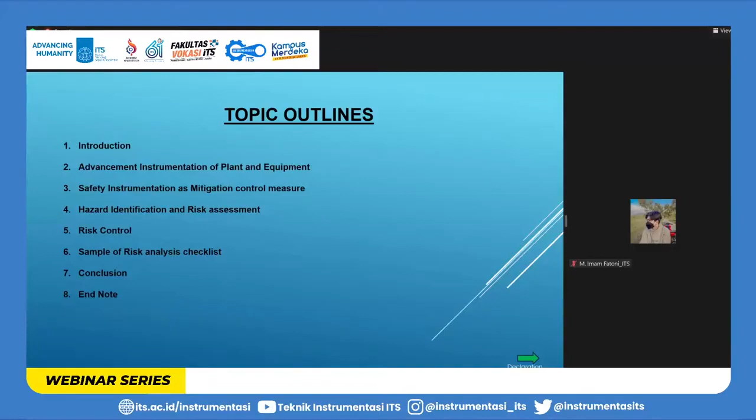Based on a report from the same agency, the ILO, they estimated that around 2.3 million workers around the world are affected by work-related accidents or disease. This results in around 6,000 deaths every single day, and around 340 million occupational accidents every year. So this is the extent of the occupational accident problem worldwide.

Now, as a case study, I would like to also show you data taken from the Philippines, but this one is a little bit late because I don't have the latest data.

Maybe they are not yet released. So in the Philippines, this one is reported by the Philippine Statistics Authority.

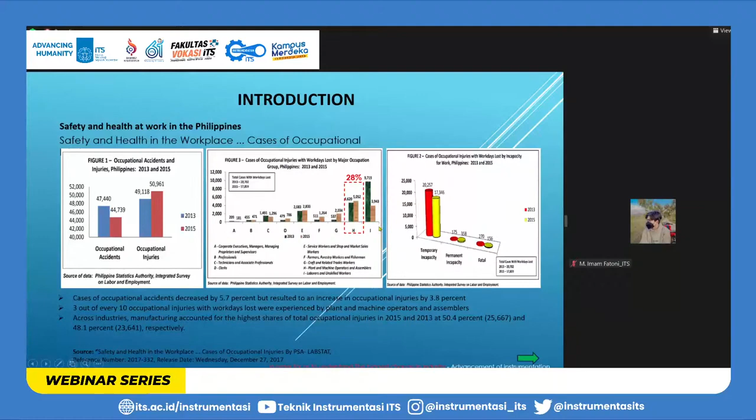A contrasting result. Now, on the second graph, you can see that 3 out of 10 occupational injuries with work stoppage, where the operator or employee cannot work, is actually coming from plant and machine operators and assemblers, or in short, manufacturing. Also significant is that the highest is actually in construction, or manual labor. But you can see on the following survey, it goes down very low, while in comparison, manufacturing is actually going up.

Okay, now on the third graph, we can see that the injury resulted in 97% temporary injury, 2% resulted in permanent injury, and 1% resulted in death.

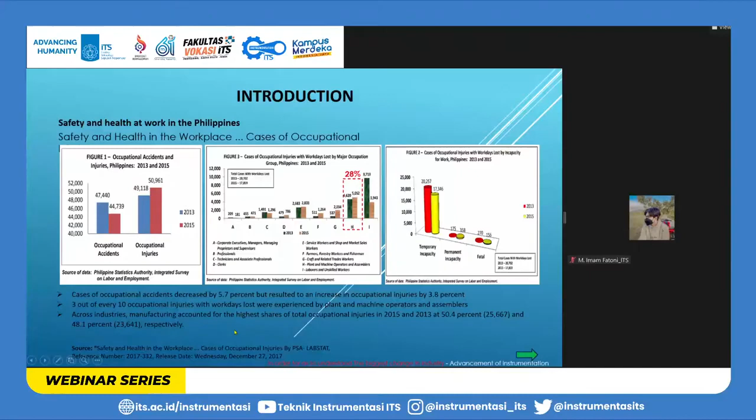One more thing I think needs attention. A significant finding is that across industries, manufacturing accounted for 50% of occupational injury. So this is very significant. Now, what is the difference between chart number 2 and this one? This highlighted 50% actually included both the major injury that caused downtime and the minor injury. So anyway, the highlight here is the 50% injury that was incurred by manufacturing.

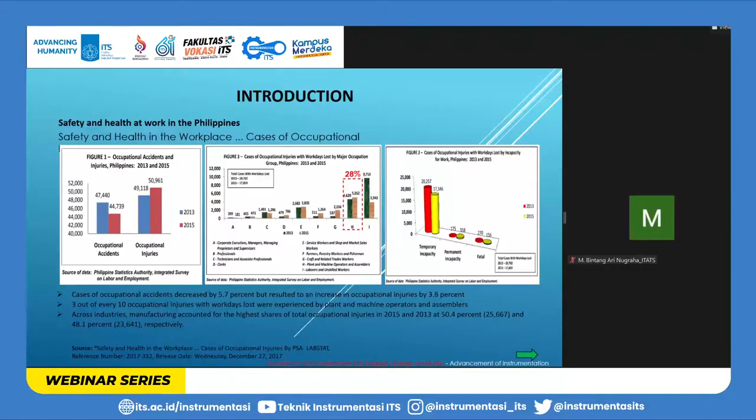Now we will check what is the difference, or the changes, or the development. Why is it that manufacturing is the highest? If you look inside the manufacturing industry, you can see the biggest change is actually the advancement of instrumentation. Many countries, even in your country, I believe in Indonesia also, advancement of instrumentation or automation is very significant, more significant than in the Philippines, I believe.

There are so many benefits of automation, such as the reduction of total operating cost, increase of production, improved operator efficiency, productivity, and increase in safety. Let me highlight this one: increase in safety. Then there's maintenance, precise measurement, improved monitoring, and many others. This is why instrumentation is very, very important.

Now let me go back to the increase in safety. I always thought that this increase in safety is the result, or the cause, of why the incidents in the first graph are actually going down. But what this cannot explain is why the result or the extent of injury is going up. Now, why do you think the extent of injury is going up, even though the occurrence of accidents is going down?

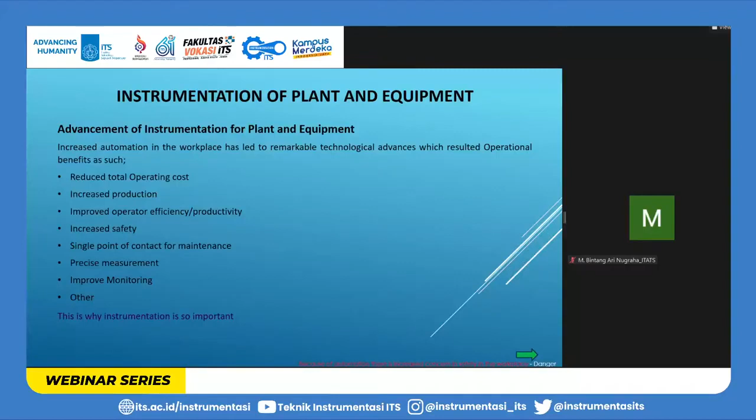The primary reason, in my opinion, is that the increase in automation makes the process more complex. Because it becomes more complex, there are many things to monitor, such as parameters like temperature, pressure, and position. If one of these fails, it may result in injury, and it may not be the person operating the machine, but maybe others. That's why most operators of machines are trained personnel.

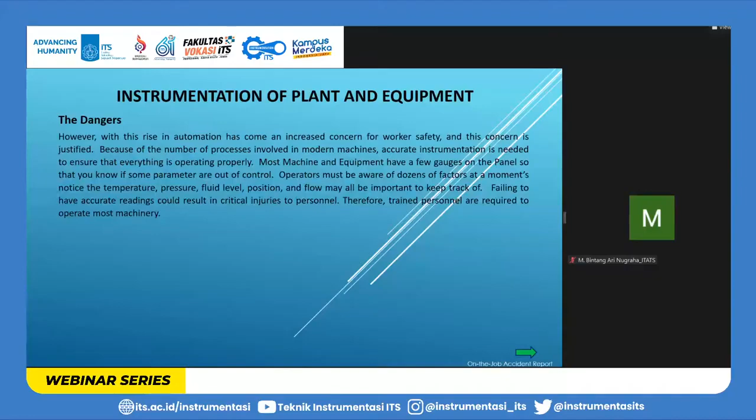Now let me show you some actual accidents that happened in manufacturing. This one happened in my previous company, in the Philippines. What happened here is that the operator's hand was caught by this press machine. This one is still lucky, because all of the fingers were not cut, only broken bones, but they could still heal. That's why it's very lucky. This is a very strong machine.

Now, what's the problem with this machine? This sensor, let me highlight this one, is a curtain sensor, or area sensor, I mean. The problem with this one is that it fails, it malfunctions. So that's why, instead of the machine stopping when the hand crosses this sensor, it was delayed, and the hand was caught.

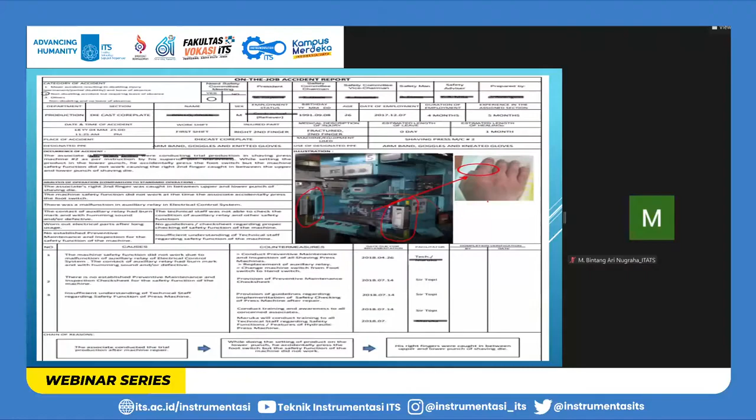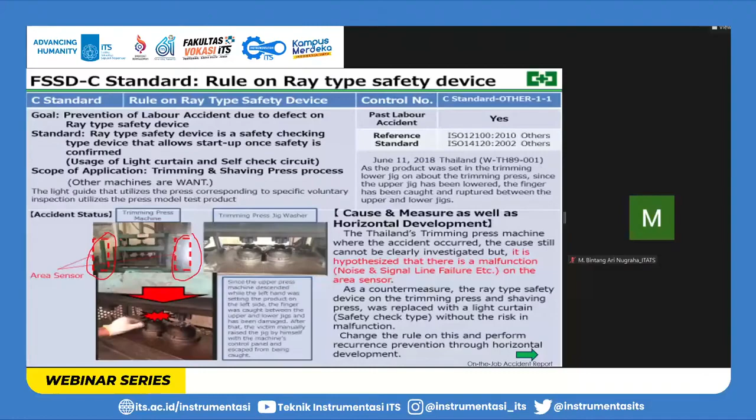This problem also happened in Thailand, at one of the branches of my previous company. It was the same machine, the same sensor. The sensor also failed again. So what happened to the sensor? Now, if we study the sensor, this is an area sensor.

But the problem is this particular relay is the one that has a malfunction. It's an intermittent problem. It's not actually damaged, but sometimes it's okay, sometimes it's not okay. So intermittent. That's why it's very, very hard to solve. Now, the question is, is there a solution to this one? Of course there is. Everything has a solution. So now, what is the solution?

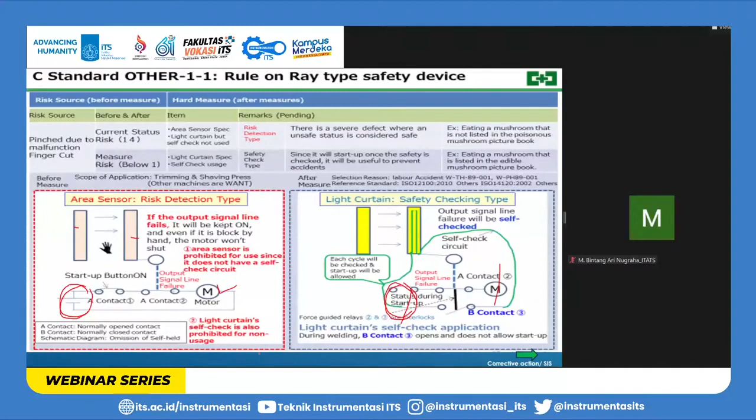Then what is SIS? Okay, SIS is a safety instrumented system that controls the system and operates if a certain safety incident occurs. So that is the meaning of safety instrumented system. The function of this SIS is to monitor the process for potential dangerous conditions and take action when needed to protect the process. Okay, to understand this one, let's take a look at this figure, the drawing in our presentation.

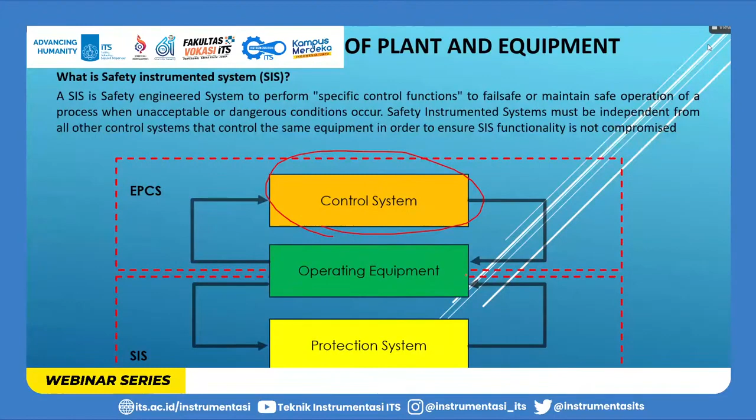Assuming that this is the machine, the movement of this machine is being controlled by this controller. Okay, the movement is based on the design to create whatever product it is designed for. Now, it also has installed many safety parts.

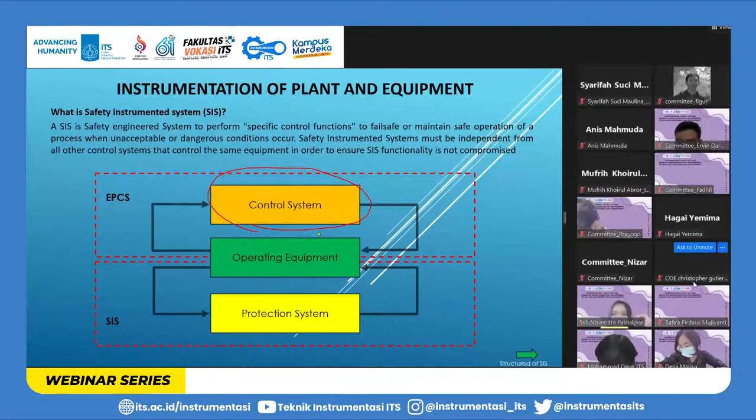Hello, Mr. Chris. We can. Yes. Yes. Okay, I'm sorry. I thought you cannot hear me. Yes. Okay. Now let's continue.

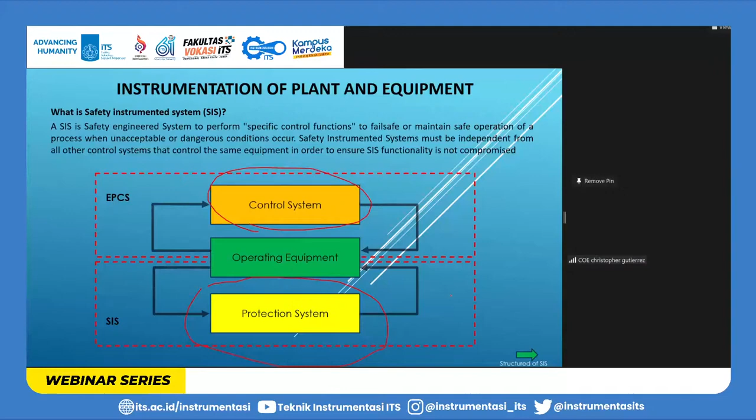Now, assuming that this particular machine suddenly has a problem, or the sensor has a problem, this particular control system will act independently. Whatever happens to this one, this particular control system will not be affected because this one is isolated. Okay? So this particular system is what we call safety instrumented system. Now, to explain more of this, we will have a very simple example.

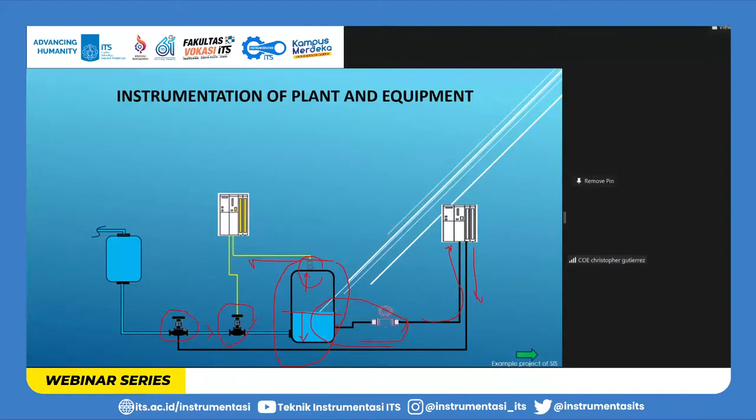What happens is that if ever the sensor fails and this fluid goes up, immediately this particular sensor will detect it and send a signal here that will be compared by this controller, so that this particular valve will shut off the flow and return to the normal position. That simple control system. That's how the SIS works. Now, there are three parts to make a complete system for SIS. Number one is the sensor, which is to detect the data, then the controller to process the data, and the final element, which is the actuator.

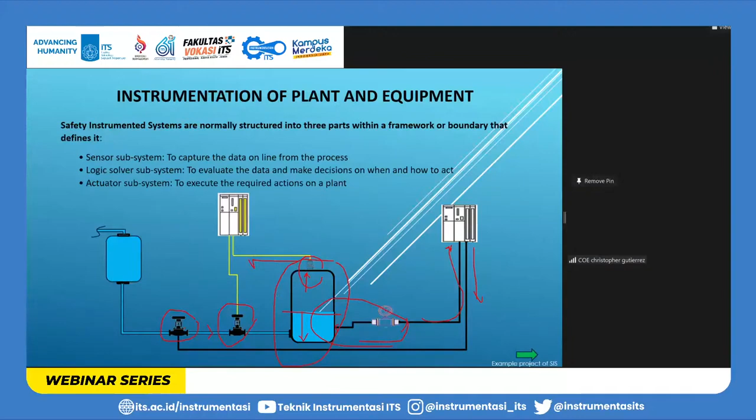Now, let me give you some example of a project that we have done in a company that uses this SIS. Okay, actually this is also an accident that happened in Vietnam. Same company, but the branch is in Vietnam. What happened to this machine is that this particular machine has three molds. 1, 2, 3. Now, in Vietnam, the accident happened, all of these molds fell down.

Okay, that was a major accident. Imagine you are pressed with this metal, a very heavy one, and this particular mold is very hot, around 200 degrees. Imagine the fate of that operator caught in this machine.

Now, the Indian factory actually created a system, also an SIS, which is this one, an independent system that protects the operator. If ever the problem occurs, this one will hold. Okay? This is pneumatic. This machine is actually a hydraulic machine, but they created a pneumatic one so that this particular machine will not corrupt the safety system that they installed.

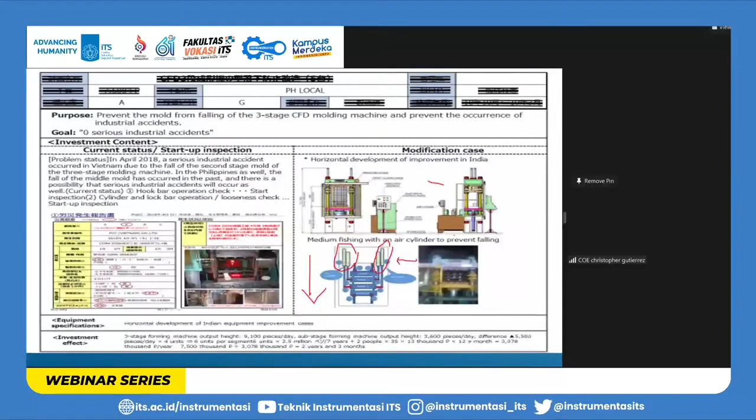Now, what happens is that if the machine is not running, not yet operating, you can open or close this door, and the initial position of this lock bar, the safety bar, is retracted, out. So you can load. Now, please be very observant of this mold, because right now, even though the door is open, this safety bar is still retracted. Why? Because there is no mold up, nothing to pull. That is why it's the initial position.

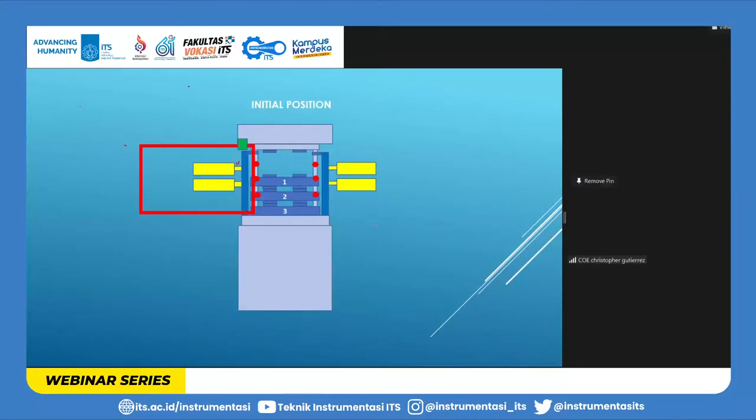But once the machine is loaded and you press the start button, it starts operating, and the machine will close the door and lock. Then you cannot open the door until the process is finished. Okay? Also, since this is in process, this particular lock bar or safety bar is in the retracted position. Now, once the mold is going up, the first one is going up, these two still have no load, nothing inside. This one will be loaded later. This one will go down.

So if the mold goes down, the door will open, then the safety bar will go in. The purpose is that whenever this one falls down, this particular safety bar will hold the mold up so that it will not fall on the hands of the operator, because we will load the material here. That is the purpose of that one. Therefore, you can load conveniently and safely.

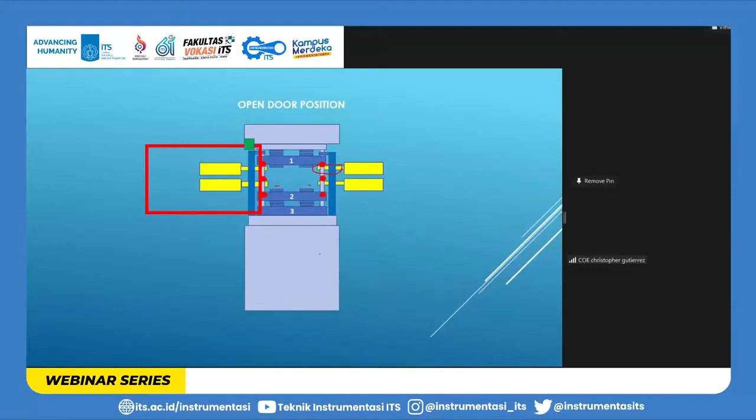Now, next you close again. If you close this one and operate again, this one will lock. You cannot open the door anymore until the second layer is finished. Then the next layer will open. Then you load again, and after you load, you close again. You see, the safety bar retracts again, and the door is closed. So that is the process that we have done for this particular problem. I hope you understand the mechanics or the procedure of how the sensor operates. Okay?

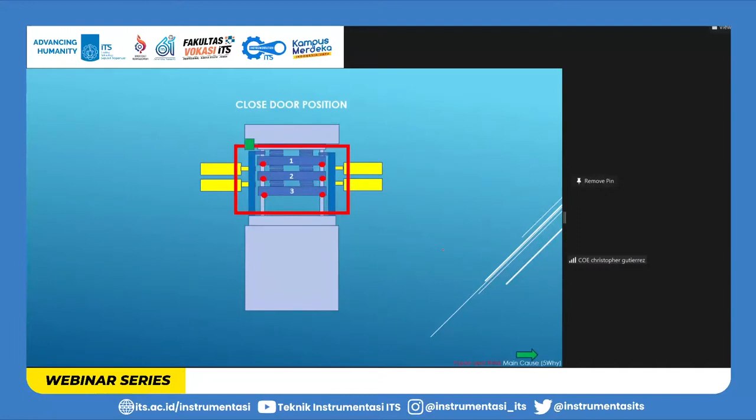Now, for this moment, I want you to pause a little bit and also do some brainstorming. I don't know if you noticed that in most of the problems I have presented, the initial cause of the problem is the failure of the sensor or some part of the machine's system. Now, the question is: is the sensor or the part of the machine really the main cause? So I want you to pause for maybe 1 minute and think about the main cause. I will leave you this question: what is the main cause of the accident?

Don't worry, it's not a graded recitation. I just want to get some ideas from you. You can put your answer in the chat box. I will give you 1 minute, and we'll start now. I want to see your answers. If the cause is the sensor, say yes, and we will find out. If no, can you suggest what you think is the main cause of the problem or the accident? Okay, you can start now.

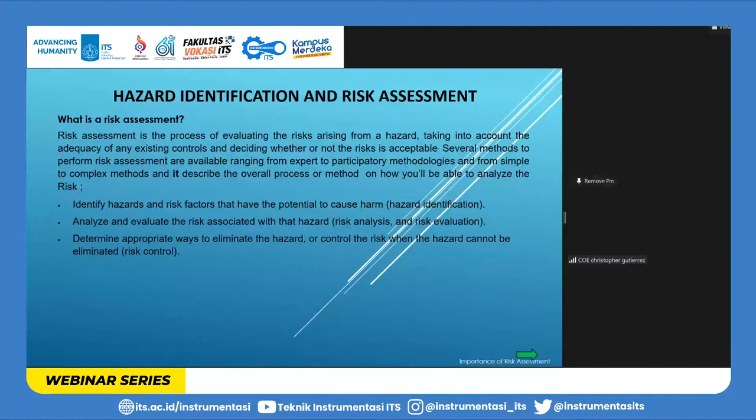Okay, now what is the importance of risk assessment? Risk assessment will help you, number one, create awareness of hazard and risk. Why is it important? Because if the person or the operator knows the hazard associated with the things they are doing or the machine that they are working with, they themselves can already avoid such risk, right?

Another one is to identify who may be at risk, okay? If we are working with the machine, then the operator is at risk. Why is it important to know who is at risk? It's because you can already put some precautionary measures to protect that person or that operator.

Another importance of risk assessment is to determine whether a control program is required for a particular hazard. Okay. We need to know the hazard associated with such a process because we can put a program or a system that can control such hazard.

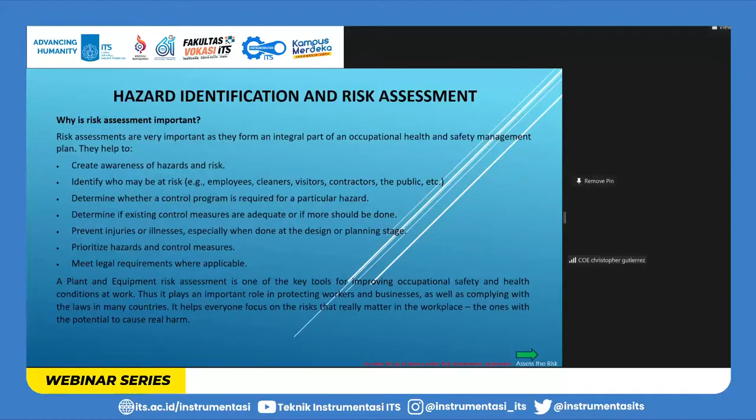Okay? And in order for us to have a broader risk assessment, we need to consider the process, not only the machine, the plant, the tools, but also all the processes, normal processes. More importantly, all the processes that are not normal. When I say not normal, it means the process is not connected to the production, or the process is only done when it is necessary, such as the installation of the machine, maintenance, repair, breakdown, and servicing. That is a not normal operation.

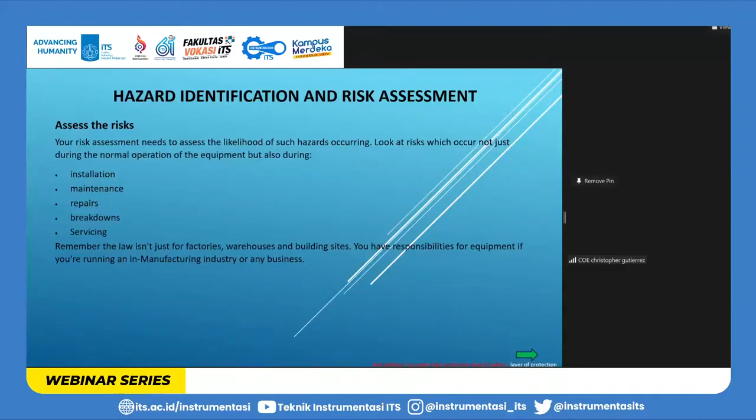Remember that the law is not just for the building, it is also for the machine or any other facility that is in your manufacturing area. In addition, if we want to have a high level of safety in our plant, in our equipment, we need to have a layer of protection. Even though we have the safety instrumented system, we will need to have a certain layer of protection so that we can assure that the accident will be prevented.

Looking at the picture, assuming the green one is the process, the first layer of automation is the process design. The second layer usually is the critical alarm. This one is when the parameters are out of control or have deviation. This one will alarm, and you can manually reset it. The next layer is the automatic system, the safety instrumented system.

Okay. The next layer is other devices, other technology. If this one is a tank, you can put a relief valve. The next layer is the plant emergency. If you still cannot contain it with all those precautionary measures, then plant emergency response. If it's still very big, maybe a very big accident, then community emergency response. So these are the standard layers of protection.

Now, if you look closely at this one, actually you can divide it into two major types. This particular layer is what we call the mitigation layer, and this one is the preventive layer.

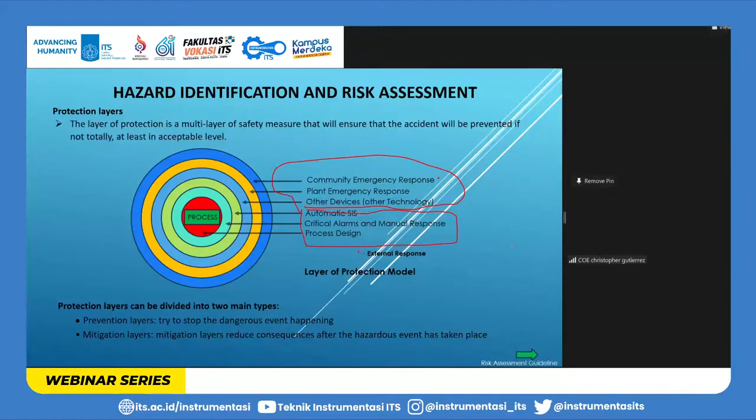Now, there are many models or guidelines for how we conduct a risk assessment. This particular set of steps is actually from the International Labor Organization. It has 5 steps, but there are many you can use. I will show you later.

Based on the International Labor Organization, step 1 is to identify the hazard. Number 2 is to identify who might be harmed. Number 3 is to evaluate the risk. 4 and 5 are documentation: record who is responsible, and number 5, record the findings. So this is the suggested guideline for risk assessment by the International Labor Organization.

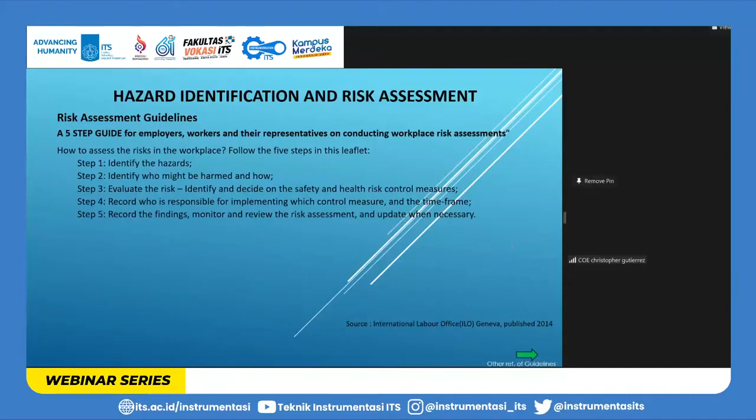Other standards you can find online. This one is occupational health and safety, a standard from the European Union. Another one is occupational health and safety released by the International Labor Organization, but used by Australia, Canada, and also the Philippines, which has its own occupational safety standard. You can find it on this email.

Now, in order for us to have a better understanding of how we manage the risk, this is a flow chart. So to manage the risk, first we have to identify the hazard and identify the risk. This is part of the risk analysis.

The next step is to assess the risk. Here we have the process of evaluation and ranking. Then we know which one is acceptable, no need to act, and which hazard is high or very high, so we need to put a countermeasure.

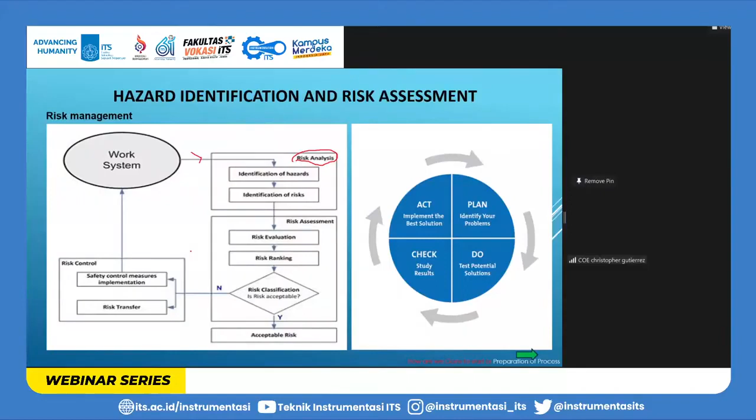Again, from the International Labor Organization, the very first thing we have to do is form a team. The team may be composed of the safety officer, the health and safety representative, and of course those affected by the hazard, that is the operators and all personnel in production. So you have to form the team, and those persons should be a member or a leader.

According to the International Labor Organization, in order to prepare the HIRAC, or hazard identification risk assessment, the first thing to do is identify who are the exposed workers, giving particular importance to workers with special needs such as pregnant women, young workers, the aging population, and also persons with disability. You have to look at it.

Another activity you have to do is check personnel or processes doing abnormal activities, such as maintenance, cleaners, contractors, and visitors. You have to consider that as well.

The next step is to consider or familiarize yourself with the characteristics of the task, the work equipment, the material, and the procedure. The purpose is to easily identify the current safety measures in use, and also to identify work accidents present, including occupational diseases related to the workplace, to aid the analysis.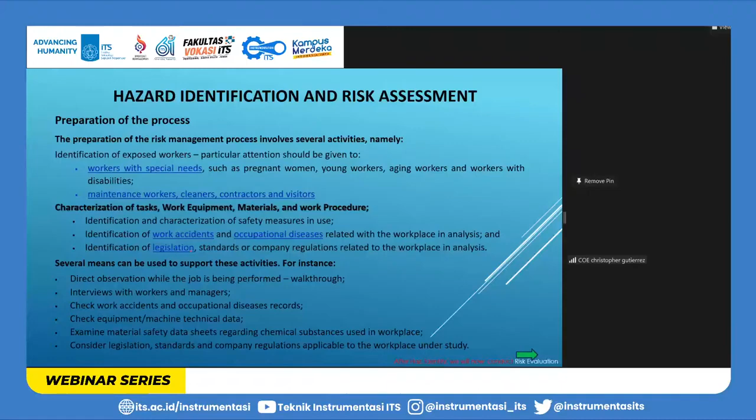So what is risk evaluation? It is the process of determining whether the identified hazard is low, high, or unsafe. That is the simple definition of risk evaluation. There are two ways to do it: quantitative or qualitative. Quantitative uses calculation, and it involves two components: the probability that the risk will occur and the severity of the potential consequences of that particular hazard.

The qualitative method, meanwhile, is the simplest one. This is often used in many factories, even here in the Philippines, mostly what I see is that they use the qualitative one. Because it's an easier method, all you need to do is estimate the likelihood that the hazard will occur and the potential severity of the harm. Combining the two, you can now evaluate the level of hazard, what likelihood, what score, or what severity that particular hazard has.

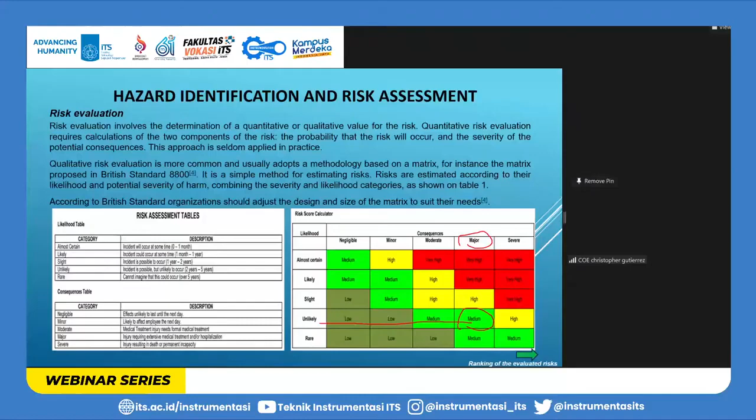Now how do we do the ranking? Based on the risk evaluated during the risk evaluation, we need to sort it. It is very important that the sorting is not just a classification you can do within the company - the action or judgment on whether it's acceptable or not should depend on the legislation or any law approved in your country. If there's no law about that acceptability, then you can refer to any eligible standard, international standard, or occupational safety and health guidelines.

So it is better, or it is mandated, that scoring the acceptability or not is not something you can decide quickly - it should be within the standard of that law or known guidelines. Now, how are we going to classify this risk acceptability or risk that we have evaluated? What you need to do is create a matrix that describes what action to take for low risk, and what action to take for medium risk. So you can also do that matrix.

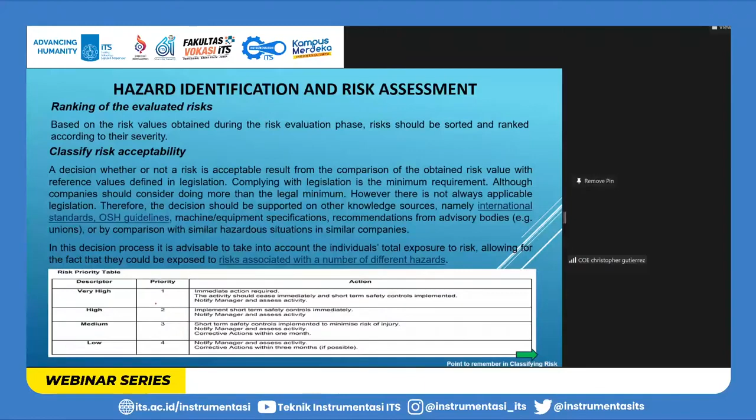But there are many important points to consider in classifying the risk. Number one is that it should highlight a particularly careful assessment of individual risk exposure. The risk exposure should be performed for workers in a special group.

The next point in classifying risk is that the risk classification is the baseline for selecting the safety action to be implemented, as we do in the matrix. It's also used when defining the time scale, the urgency of the implementation of the corrective safety measure.

The third one is to have a consistent basis for all the risk assessments. The company should first establish the acceptability criteria, but this should also be based on the law and established standards and OSH guidelines. Knowing that, we have to formulate an acceptable standard. This is an important point to remember when classifying the risk.

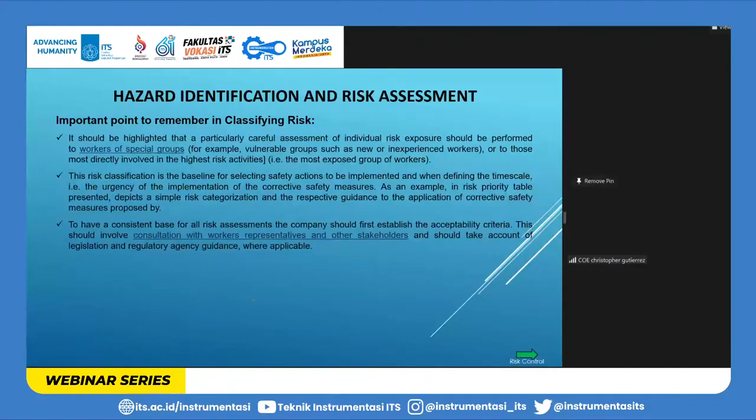Now, after we have classified all the risks, we will be ready to put control on that identified risk. What is risk control? Risk control is the stage where action to identify and implement safety measures to control risk is performed. But what's important here is that you cannot just suddenly put in a risk control or risk measurement activity without considering the hierarchy of control.

In the hierarchy of control, the number one thing you have to consider first is elimination. It is very important that if that particular station, process, or machine has a danger, and if possible you can eliminate it, then that's the best solution. Because if you eliminate it, you are shortening the process, and at the same time you are eliminating the risk.

But if it's not possible to eliminate because the process or machine is very important to the process, then the next more important control or countermeasure is substitution. If you cannot eliminate such a hazard in the first step, you check: can it be substituted? If the answer is no, then the next control measure to consider is engineering control.

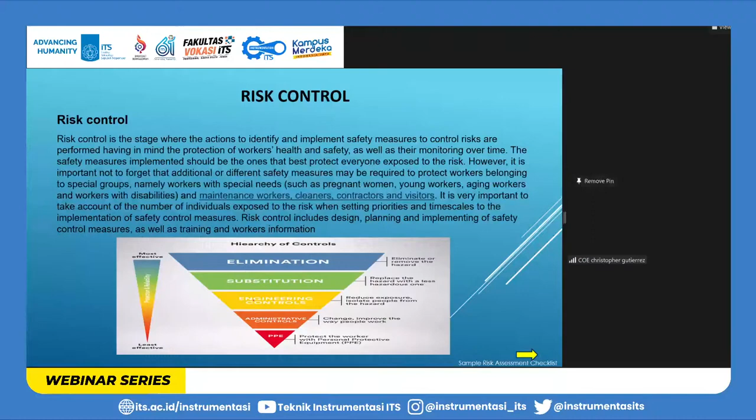Okay, this is an example of risk assessment. So if you're going to have a risk assessment, the first page should be all about the machine you are considering. I put a grinder, a bench grinder, because it's easy to make.

So what's in the first page? First, as a reminder, this particular risk assessment is in line with the procedure. On the upper part is the overall rating of this process. The rest is where it can be found, and the time and date of assessment. And the next one is about the specification of the machine.

Also included in the first page is whether this particular machine has a legal or law that needs to be abided. So what particular law? The second layer on the right shows what particular rules are applied, and also included here is the team member.

If the score of the hazard is very high, we will need to require the signature of probably the school - this might be the president of the school or the one who is overall in charge - informing him so that he can be informed that this particular process, machine, or equipment is high risk. If very low, it's not required.

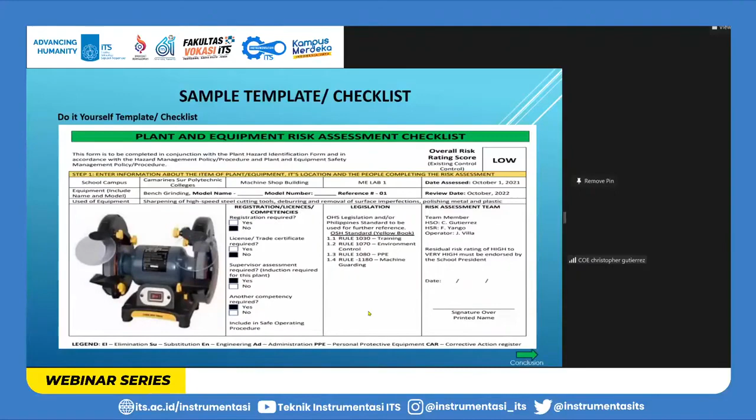So this is the example of risk assessment. Now, in summary, in conclusion, safety instrumentation is just a part of general risk assessment management in a manufacturing plant.

And for safety instrumentation to be effective, the following points are needed. Number one, you have to have a systematic hazard identification. Otherwise, if you don't know the exact risk to that particular machine, you cannot make an effective safety instrumentation. Maybe you can make one, but it will not be effective.

So the next one is hazard evaluation. You need to know if that particular hazard is acceptable, and it will be judged by the right person. Oftentimes it is the responsibility of management or the corporate to judge if that particular hazard is acceptable or not.

The next one is to assign a risk reduction function layer of protection. It is very important to ensure a high level of safety in our plant, in our machine, in our facility. Another point is to ensure that each safety layer is implemented to deliver the required risk reduction.

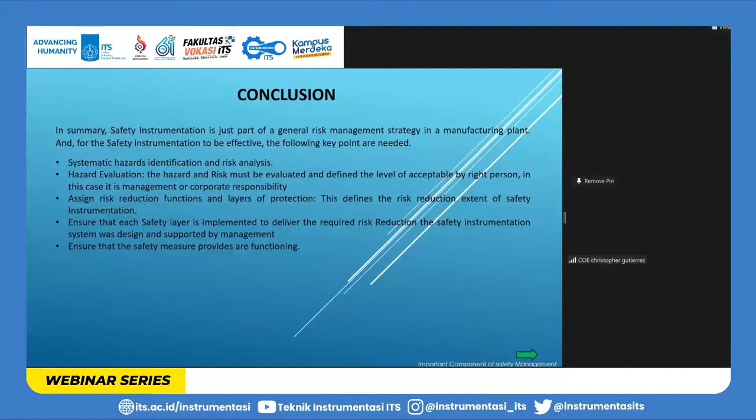Before I end my presentation, I would like to state the fundamental components of safety management. Number one is to have a systematic method of identifying risk. That's what I presented to you with the safety instrumentation system, but it is equally important that you have a systematic method of identifying the risk, and it must be documented.

Also, ensure that all unacceptable risks are reduced to an acceptable level. If you identify that the risk is high, you have to prioritize it. It cannot always be eliminated, but at least you reduce it to an acceptable level.

Number three is to have monitoring and review in place, monitoring the implementation and performance of all safety measures. This is very important, because even if you put the best system of protection or safety in place, if you cannot monitor it, eventually over time it will degrade. It will not be effective anymore. So safety is a continuous commitment.